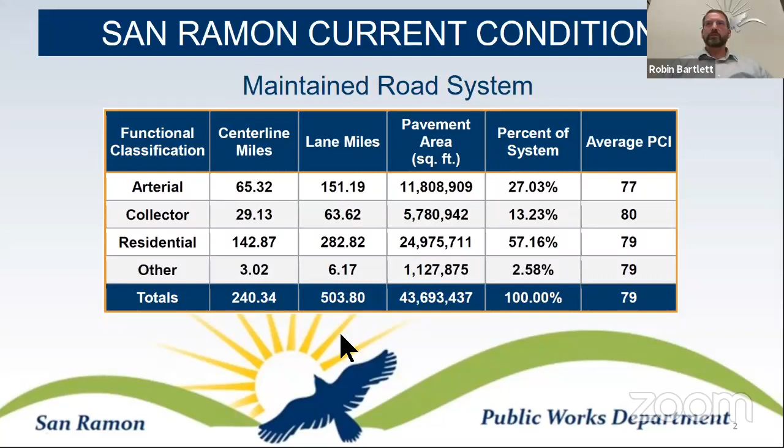So this is our typical summary. As you see, we're currently at an average PCI of 79. Our collector streets are doing a little bit better than that at 80, and our arterials are at 77. However, there will be a fair amount of upcoming work on our arterials, so hopefully we'll see some improvement there.

And just a reminder of the kinds of things we're talking about in terms of the treatment. When we have pavement in good condition, up in the 80s, more likely up even into the 90s, we may just be focusing on crack seal. And crack sealing is also a preventative maintenance operation that will continue throughout the life of pavements. As the pavements begin to deteriorate, we look at more substantial maintenance, which we are typically describing as light maintenance, would be a slurry seal.

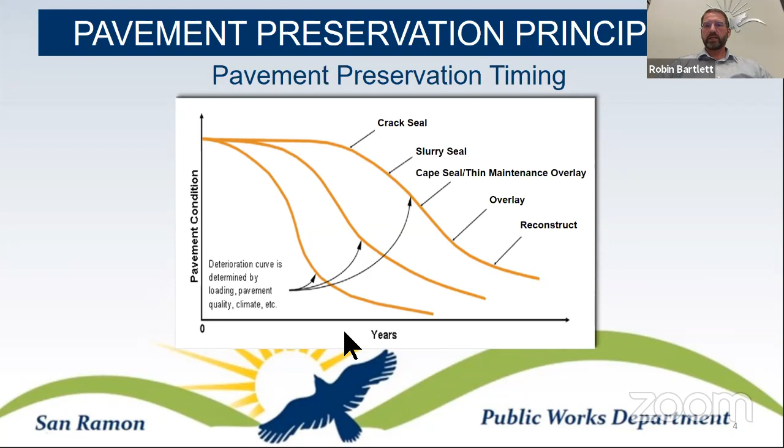As the amount of dig outs increase, that may start to be considered a more heavy maintenance. And then we'd start transitioning into cape seals and thin overlays. It starts becoming light rehabilitation with thin overlays. So the heavier overlays, we're considering that a heavy rehabilitation, and then we get into full reconstruction.

Going along with that is a cost factor. The most cost-effective pavement maintenance operation we have is the crack sealing. Then we get increased cost with the application of the slurry seals. That of course goes up as we need more dig outs to make them work. Then yet more cost for the rubberized cape, more cost still for the light rehabilitation, and then the heavy rehabilitation.

So this gets back to talking about our critical point process for maintaining the roads. And as we cross each one of those lines in the condition, we see a considerable increase in the cost, and hence the mantra we try to live by, which is keep the streets in good condition rather than letting them cross that line. So maximize the amount of preventative maintenance.

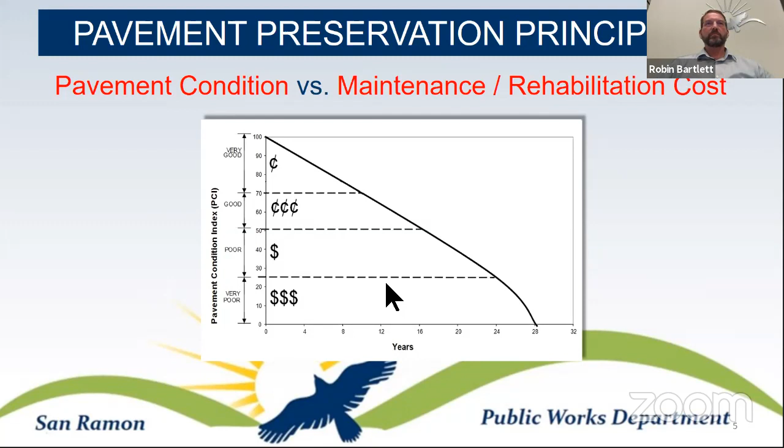So as I mentioned, we're looking at quite a few challenges and quite a bit of uncertainty this year. There's a lot of sources for that. One of them, of course, is the current COVID-19 health emergency, and that can have a number of impacts, from delaying the ability of us to get design packages out, increased safety measures that could result in increased costs from our contractors, as well as other impacts in just getting things done. However, there's a number of others.

One thing that we're dealing with is trying to integrate the COP; one of the provisions of that ties in with the bike lanes. So there's a desire to do some bike lane work, and that was identified as a potential COP project. However, we don't want to be putting nice new bike lanes down on streets that need upcoming maintenance. So we may need to move things around a little bit and either use some COP money for some pavement and then later use some pavement money for bike lanes, or change around some of the timing of some of our streets to make sure that we're able to accommodate that work.

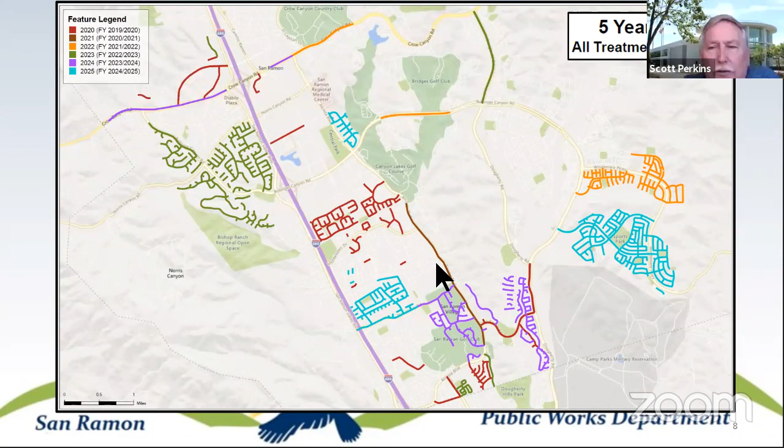As usual, I believe you guys have always created a package, and then you had a couple of, if the price was right, a couple of additional additive programs. Is that correct? That is correct. And this year, that piece of Crow Canyon would be one of them.

We're also looking to potentially add some of the work that is in the Old Ranch Summit area, because we will be doing work on Old Ranch Road itself. So we're going to be right there. And some of those streets have also had some prep work that was done recently, and they had the impacts from the waste management hydraulic spill that we mentioned in the report. Yeah, thanks.

So this map's the same thing, but it breaks it down into more the type of maintenance. The light green, those are the best streets. So that's where we're doing the light maintenance work, more typically slurry seals. Then you get into the blue streets. That's a heavier maintenance. So that's either slurry seals with more substantial dig outs or the rubberized cape seals.

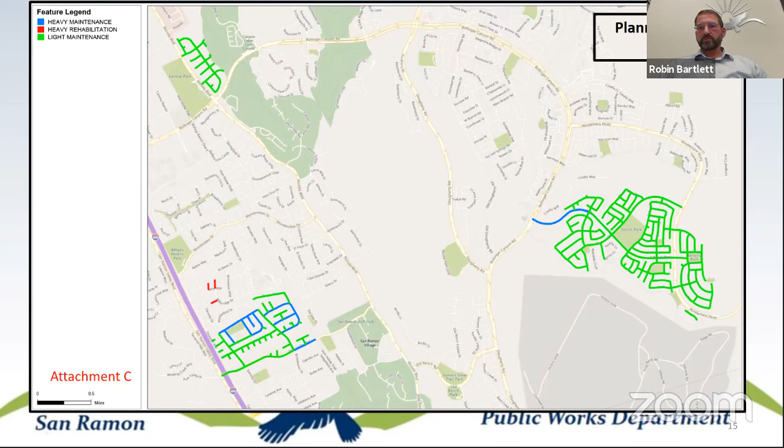And 2025, again, is going back into the Dougherty Valley and trying to get preventative maintenance done on the remaining streets out there. By the time 2025 is done, essentially all of the streets in Dougherty Valley will have been treated. And that brings me back to the squiggly line chart.

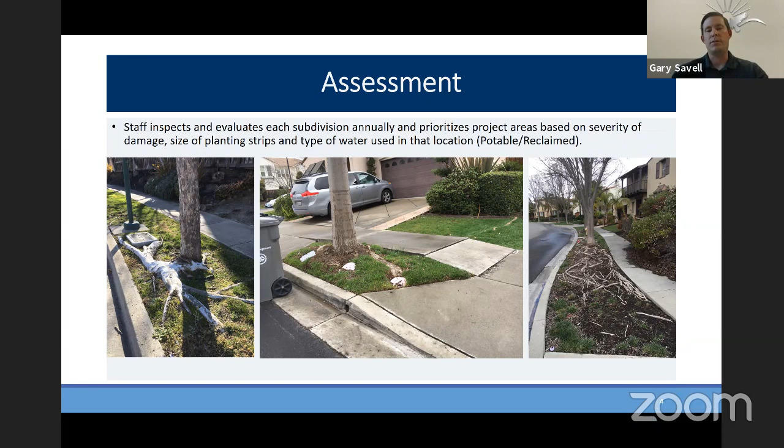So once we have submitted and got approval of the AWP plan, we begin the process by notifying homeowner associations, if applicable, outlining the work procedures planned for the neighborhood. In areas where subdivisions aren't represented by homeowner associations, notification letters are mailed out to individual addresses affected. So that's just a sample of the letter we send out.

The next step was to do a site survey. We go out in conjunction with those decision-making matrices for developing tree retention, replacement, and removal. Following that assessment, we will go out and post notice of tree removal signs on each of the trees that are indicating reasons for removal. So there's several reasons. It could be hazardous, close to the water meter, sewer damage.

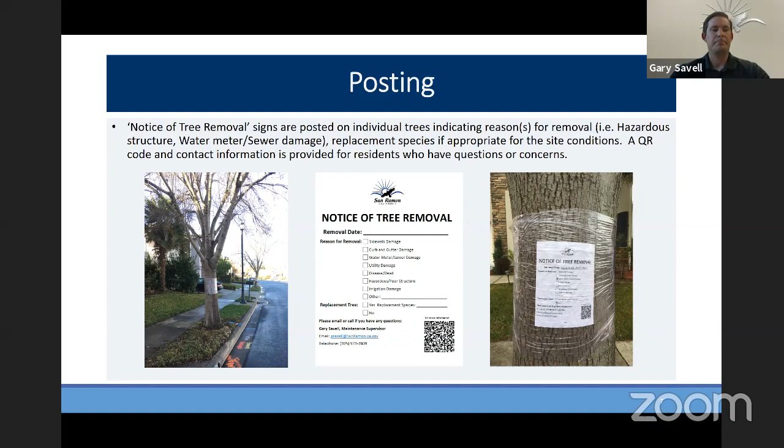And then also on that notice, we'll be putting on the replacement species if it's appropriate for the site conditions. We also provide a QR code and contact information so the residents can contact us with any questions or concerns. This has proved to be one of the most important steps in the process. We give a 7-day waiting period approximately so that residents have the ability to communicate questions and concerns to staff about the project. This may be extended depending on discussions with the residents and to work through any concerns.

The next step is to begin the tree removal process. So we contract with West Coast Arborists. They'll go out and submit USA tickets to clear for utilities at each of the removal sites. Then they'll proceed with removing the tree and stump, typically at the same time.

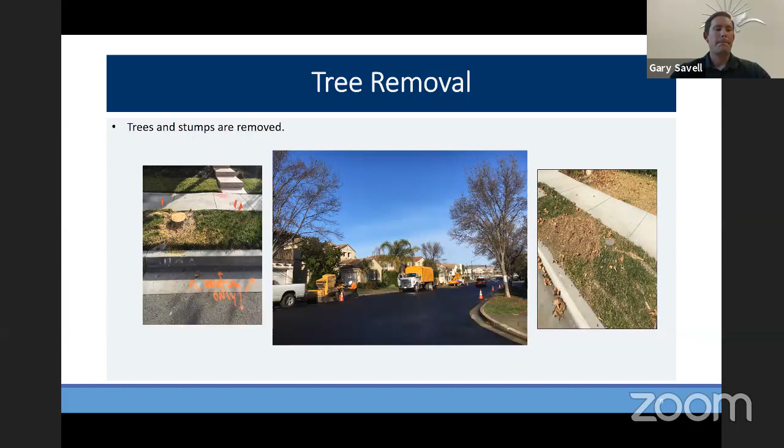This is followed up with turf removal. So one of the major causes of the surface root damage was because turf was planted in these park strips. So turf is removed from the entire strip. At that time, the soil is also remediated to reduce compaction, improve the soil permeability and soil quality in preparation for planting replacement trees and ground cover.

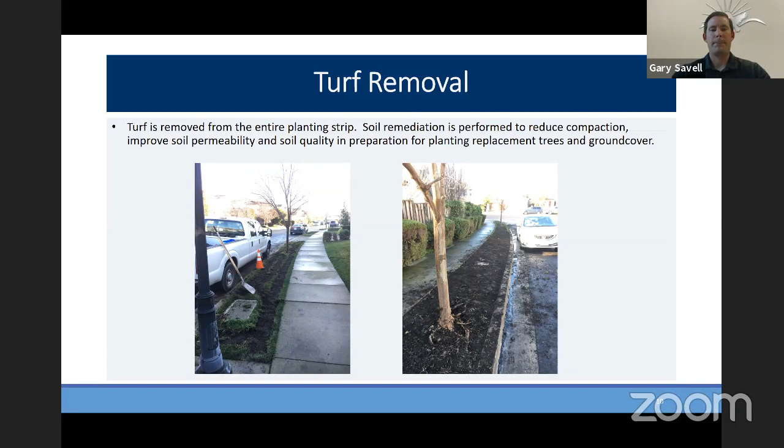The next step will be planting. So we plant trees that are listed in Appendix 3 on page 23 of the plan, as well as the ground cover species that are outlined in the plan. Again, we put these in our notification letters and on the postings so that residents are well informed about what species are going back in these locations.

And then in order to comply with some of the new California water ordinances, specifically WELO, the Water Efficient Landscape Ordinance, part of that in the plan calls out for us to convert the irrigation system from overhead spray to individual bubblers for each tree and ground cover plant.

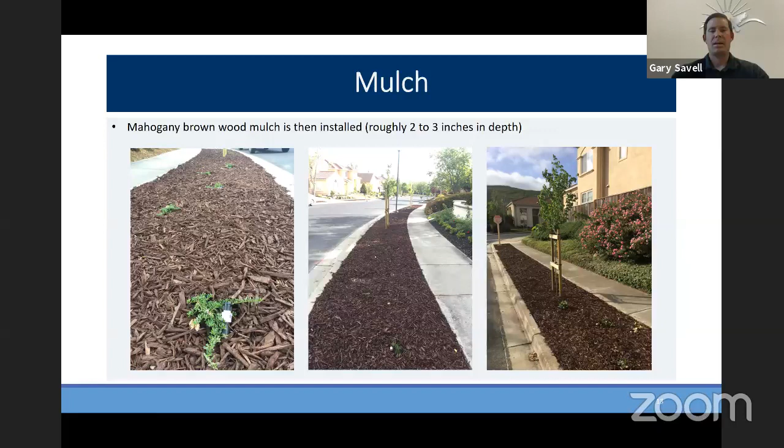And then finally, the last step in the process is we apply mulch to the park strip during the establishment period. So we use a mahogany brown mulch that's applied at about 2 to 3 inch depth. And that's the basic last step of the process.

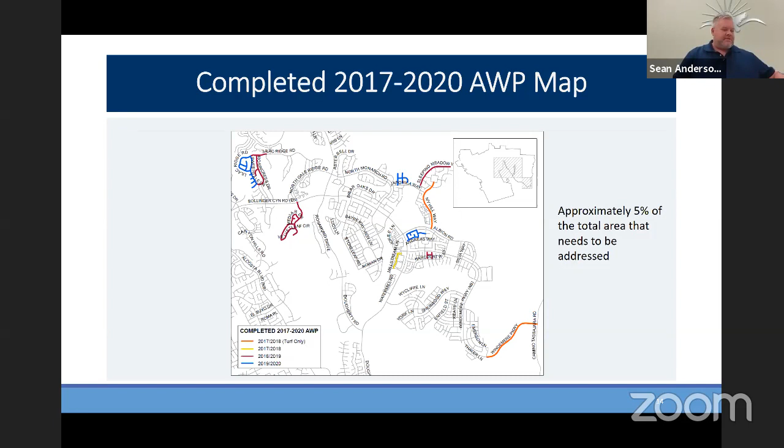And these are the list of the areas that we've done. Number of tree removals, we removed 616 trees. We've done 509 replacements, and we've removed almost 300,000 square feet of turf in both potable and reclaimed water. Just as a number, the replacement tree factor is about 83% replacements for removals.

Here's some of the resident feedback that we get. During implementation of the annual work plan, staff provides residents the opportunity to voice questions or concerns before any work begins. Common questions staff encounter include the following. Will my tree be removed? Why is my tree not being removed? Can I keep my tree? Can the roots be cut? What type of replacement tree will be used?

What size will it be? How big will it get? Why is the turf being removed? What type of plants will replace the turf? Will the sidewalk be repaired after the tree removal? Will my water meter box be repaired? So those are the most frequent questions we get from residents during this process.

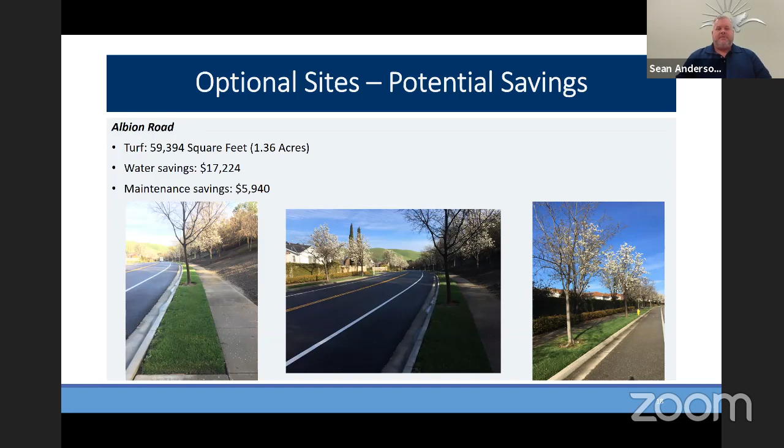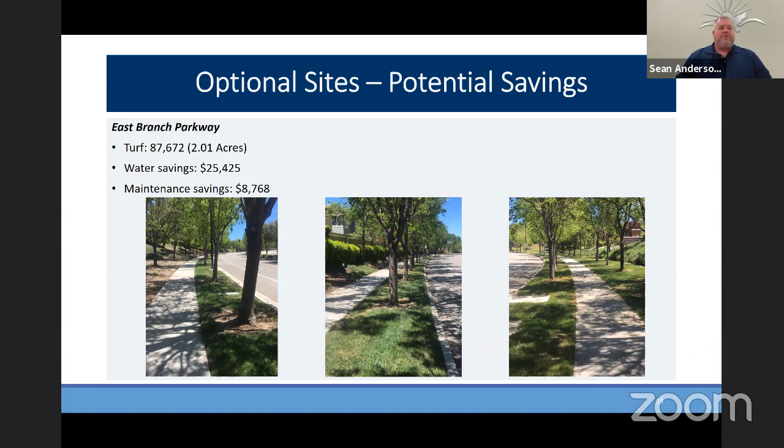Another one is East Branch Parkway. Turf is approximately 90,000 square feet, 2 acres. Your water savings is approximately $25,425 per year. Your maintenance on turf mowing is roughly $8,700 per year. So in how many years do we recover this? Because there's going to be cost of that turf as well, right? What's that? I'm sorry, I missed that. Sorry, the cost of replacing that.

Yeah, so basically what we're talking about is removing the turf and just leaving it mulch. And really our ultimate plan is if we continue the project like we are, once the neighborhoods are done, we will be going back to some of these arterial roads and possibly planting these. We're definitely showing a cost savings just in the mowing and the water for now. If we go back and put in the ground cover and convert the irrigation, there still will be a cost savings, but obviously not as much as this, because we will be continuing to water and there will be some maintenance, not as much as turf mowing. So it's about half roughly. Half of what is up here?

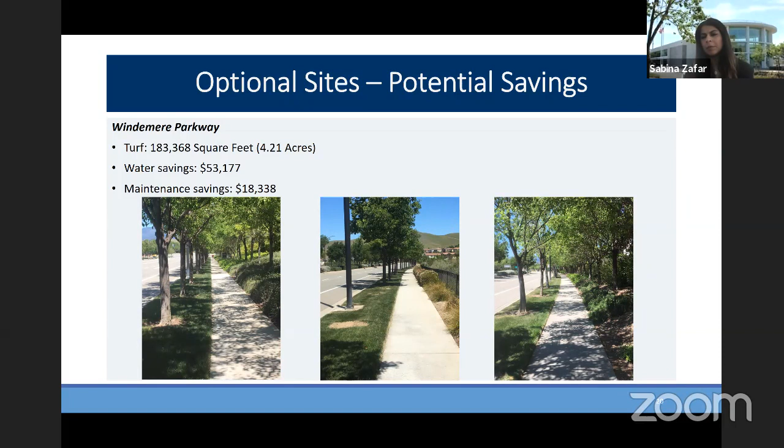Do the utilities manage some of these trees and their upkeep? Nope. They don't do anything? They don't help us at all. This is kind of on us. All right, Gary.

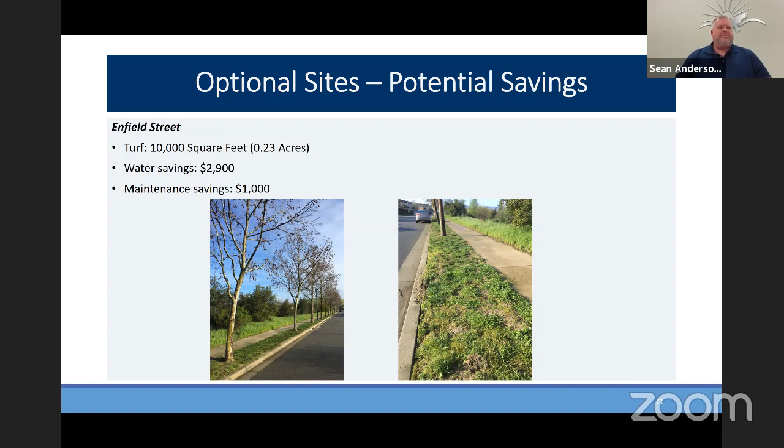So here's the next step. Staff will continue implementing the proposed 2021 annual work plan with feedback from Committee incorporated. Notification of the AWP will be sent to HOAs and affected residents.

Work will be scheduled and coordinated with the city's contractors and progress according to the plan as funds are available. Staff will develop a new AWP each year during the city's annual budget development and approval process. Well, basically, that's the end of my talk. Any questions?

For future presentations, because we're going to do one of these every year, I like the fact that you gave us a summary at the beginning as to how many trees and how much turf have been taken care of. Could you also give us an accumulated cost? How much will we have spent by the end of this fiscal year or next fiscal year? I'd like to know when we reach $7 million and $12 million.

One time we were talking, this project's going to be a $20 million project, and I suspect it probably will be. But I'd like to kind of keep track as to how we're spending the money. How much money have we spent at that time? Okay, so completely separate.